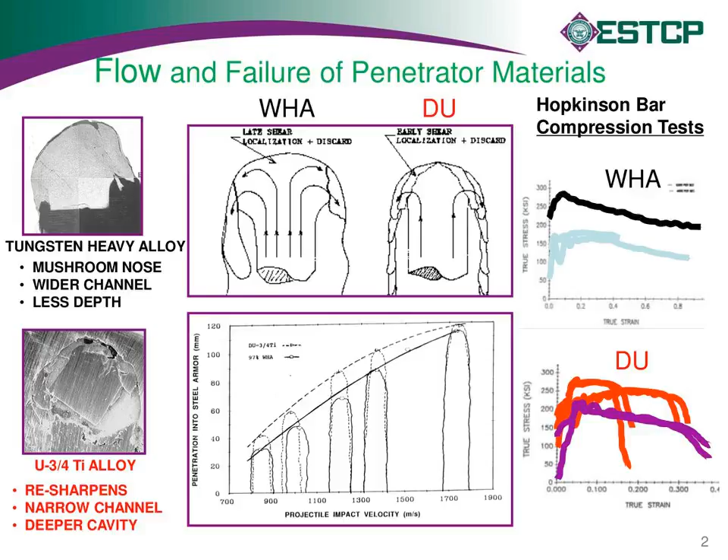The next slide, which would be slide 3, shows why we were taking this approach with a nanocrystalline version of tungsten heavy alloys.

In general, nanocrystalline versions of all materials tend to be stronger, tend to have less strain rate sensitivity, which is another thing that can tend to keep things plastically stable, and have less work hardening capacity because you've made them so much stronger. So there's a lot of basic reasons why a nanocrystalline version of almost any metal is going to tend to become more and more plastically unstable.

The illustration is in that plot there for just iron, pure iron, as you go from a grain size of 20 microns for the lowest curves. The curves here are both the quasi-static curve, which is the solid line, and the dash curve is the dynamic, in a dynamic compression test, the split Hopkinson bar.

As you refine the grain size from 20 microns, the two lowest lines, to 1 micron, it jumps up. You see the strength has gone up a lot. And then as you continue to refine the grain size, the strength continues to go up, but the shear collapse, that shear band collapse, suddenly appears in the nanocrystalline iron.

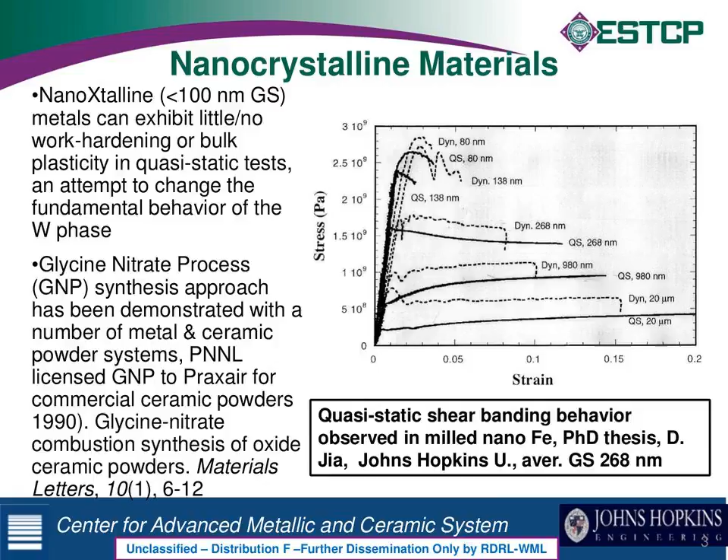So that's very quickly, that's a background in terms of why we were taking this approach, what we were trying to do with it. The next slide, just the technical objectives.

When we started this project, there wasn't a real demonstration that we could get this behavior with a nanocrystalline tungsten-based material. So that was the first objective, was to demonstrate that yes, we can get the shear banding behavior and that penetration behavior by going to a nanocrystalline version of a tungsten-based material.

Then we wanted to develop a process for making those materials in a cost-effective manner. And at the same time, and we'll get into it a little further in the talk, there were issues being raised with the conventional tungsten heavy alloys in terms of health hazard and possible carcinogen, mainly due to the nickel-based matrix.

Mainly due to the nickel-based matrix that holds together these tungsten-based composite materials. So concurrently with this test, we are looking at those issues and using the information from that to guide us in terms of what we select for the alloying additions or the matrix materials in our nanocrystalline composites.

And then the last statement just said, one, there should be a cost saving life cycle wise by eliminating DU. And there's also the political issue with DU that at the time, again, when we started this project, DU production was scheduled to end in 2014.

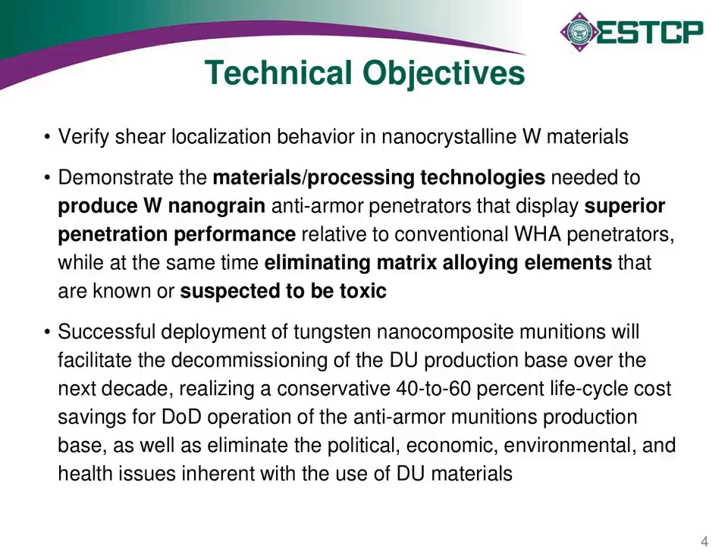The next slide. Lee, what's the, let's say, environmental rationale for closing down DU production? Because I imagine there's big stockpiles of it.

Right. I mean, most of the raw materials, of course, are coming out of the nuclear industry. Originally, they used up a lot of the green salt. Now they're using a lot of the gas, hexafluoride gas.

I mean, the whole rationale for not using DU, I think, is kind of weak in terms of the actual science of why they want to move away from DU. It's mostly political.

When they've done side-by-side tests with DU, actually DU is pretty safe. They've been tracking the guys from the first Gulf War. There was a lot of them that got fragged with friendly fire, so it was our DU ammunitions that were embedding frags in these guys, and there's really been no ill effects from that. Some of the rat studies they've done since then show DU really isn't an issue. Some of the tungsten heavy alloys are actually worse, and Brian Schuster will go into more details about that, but again, coming mostly from the matrix alloy, not the tungsten phase itself.

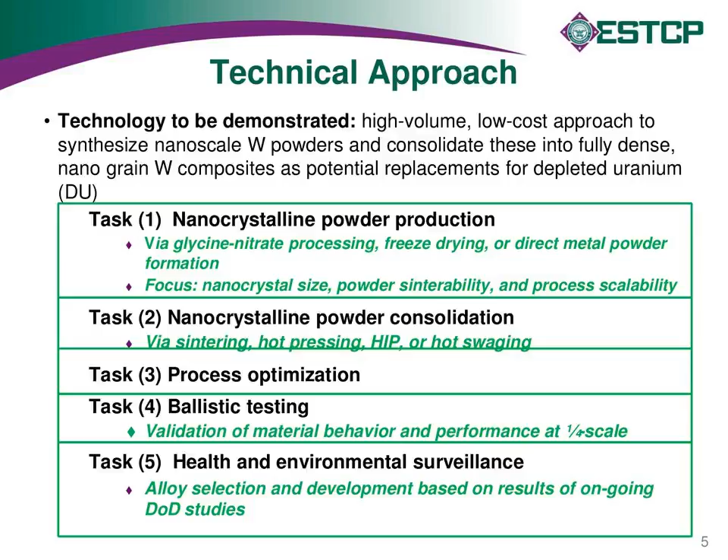Okay, next slide. Just very quickly, there's a flow chart of the two main approaches we looked at. On the left is the freeze-dry process, where you dissolve metal salts in a liquid, sublimate out the liquid, and then reduce it in a hydrogen-reducing atmosphere to produce the metal powders.

The other approach, and our main focus, was the glycine nitrate process, where again you dissolve the metals and the ammonium tungstate in a nitrate solution, which is heated until it dries out and then combusts, again reducing it to the metal powders in the end.

I don't know if Kirk has any other things to add to this at this point. I think the only thing I would add is that the glycine is a pretty energetic event. So when this spontaneously combusts, that's what produces the fine particulate size—it's the high energy associated with the combustion, and so that's how you end up with the nanoscaled materials.

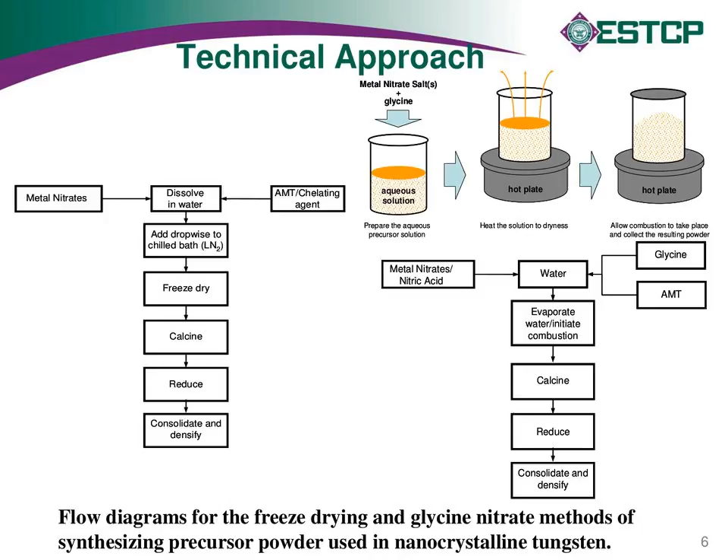Slide number 7, just a couple of quick things, more details on the technical approach — this ballistic test, just a schematic showing how we do those kinds of tests here at the lab.

We do ballistic comparisons against actual RHA, rolled homogeneous armor plate. You see in the yellow box an example of a laboratory sabot, so we can put the material in a launch package. It's pushed out of our lab gun through our experimental setup, which has X-ray equipment to measure velocity and measure pitch and yaw, because that can really push your numbers around. So you have to verify you have good pitch and yaw at impact, and then look at the residual velocity out the back, or how much penetration into steel you actually have.

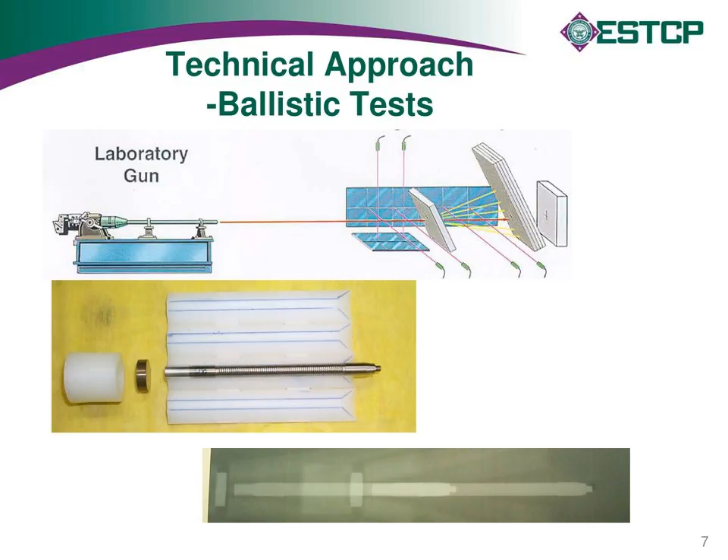The next slide shows what we were going to do. We have a large database for both conventional tungsten heavy alloys and DU alloys for a standard set of rods. These are all 65-gram mass rods. This particular plot shows data for an L/D length-to-diameter ratio of 15, so the rods are 15 times the diameter in length. On this plot, I'm plotting limit velocity — the velocity required to perforate a given target, in this case a 3-inch plate of rolled homogeneous armor — as a function of alloy density.

If you look at the black line with the black data points, those are all conventional tungsten heavy alloys. As you go from an 80% tungsten nickel iron to 90%, to 93%, to 97%, as you go up in density, the rod gets a little shorter but also shrinks in diameter, and the mass-to-presented-area of that projectile shrinks down. So you see this general trend: the limit velocity drops, meaning it takes less energy to get through this 3-inch RHA plate with the higher density material — that's your typical trend line. Those are all mushrooming-type tungsten heavy alloy materials, like you're seeing in that little box there.

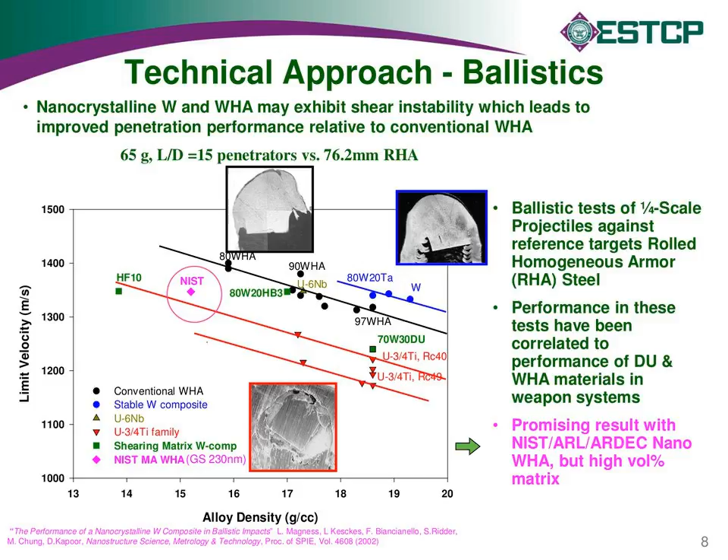Next slide. A couple of quick slides just on some of the background and the health effects with tungsten heavy alloy. Again, Brian Schuster will get into more detail with that, but this all came out of a study they did for the Gulf War illness things, looking at those DU frags. They were worried about the DU frags in the troops, and they decided to throw in as a comparison some conventional tungsten heavy alloy pellets as well.

What they found was after 2 years, the DU rats were fine, no ill effects at all. But after 6 months, all the rats that had been embedded with tungsten nickel cobalt, which is one of the major alloys that's out there, all of them had nasty tumors that had metastasized to the lungs, and they all had to be destroyed within 6 months. They were usually showing signs within 3 months.

And when Brian looked at the pellets themselves, what he saw was, with tungsten heavy alloy, it's a composite of these tungsten particles embedded in a nickel, cobalt, tungsten matrix that, at least to a depth of 3 or 4 of these tungsten particles into the microstructure, the matrix had been completely dissolved away. So you basically put a galvanic cell, 2 dissimilar metals in a salt environment in the body, and that nickel cobalt matrix showed up in the bloodstream, in the urine, and nickel was a known carcinogen. The cobalt probably didn't help, but it certainly didn't help limit the amount of nickel that went into solution. So that was a surprise out of those tests initially.

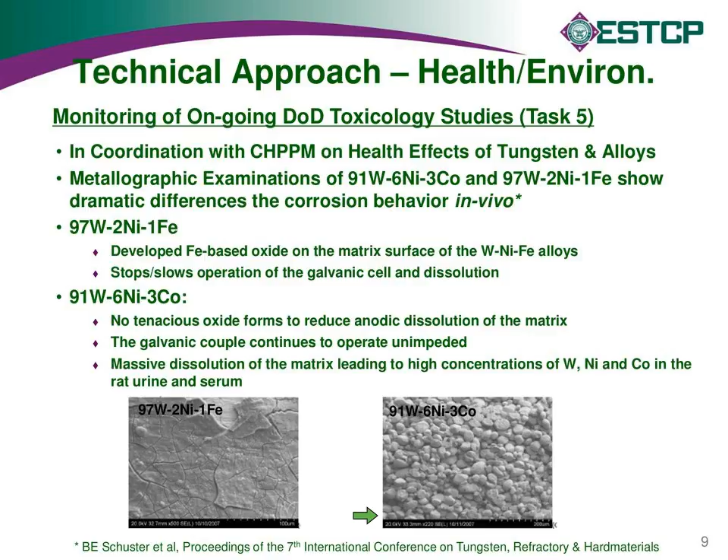Next slide is some of the other things we were going to be doing: collecting some aerosols, the respiratory health things. We did that during some of our large caliber ballistic tests, collecting some of the aerosols. Brian worked with the University of Texas on doing some bioassay work on that, on cytotoxicity. And then the main thing he looked at was different families of tungsten heavy alloys with different ratios of tungsten, nickel, iron and cobalt, and how much iron you needed in the system to make it protective against that corrosion and dissolution of the matrix. He'll go into more details on that, but just to give you an idea of what the approach was going to be.

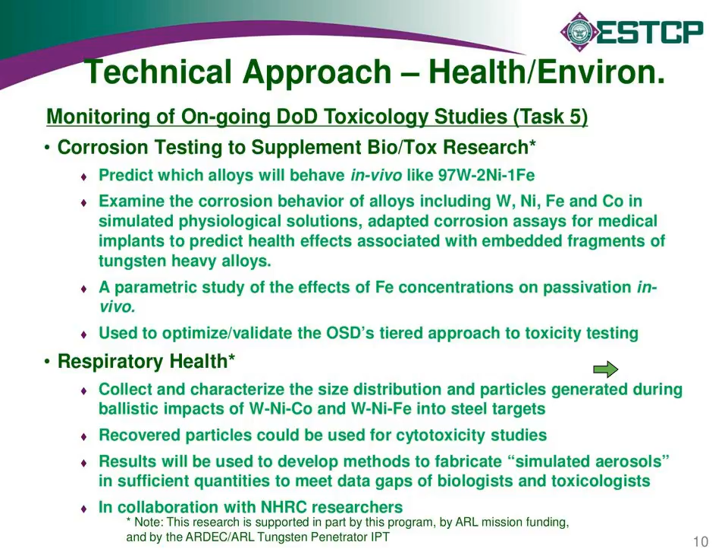I'm running a little late, so the next slide is, well, that's a residual — you can skip that one, skip 11.

So on to the results with the nanocrystalline — this is mainly task 1, nanocrystalline powder production. Again, we looked at those 3 different powder synthesis approaches. Our criteria were: how fine a grain size powders could we produce, how sinterable were those materials, and how scalable was the process going to be. Eventually, we down-selected to the glycine nitrate process because it did produce the finest tungsten crystallites, averaging around 30 nanometers, whereas they were like twice that size with the freeze-dried process.

We had reasonable success getting to moderate densities in the early sintering process with that material. As Kurt just explained, it's a reasonably well scalable process to do production also. So we thought that was the best approach to take going forward.

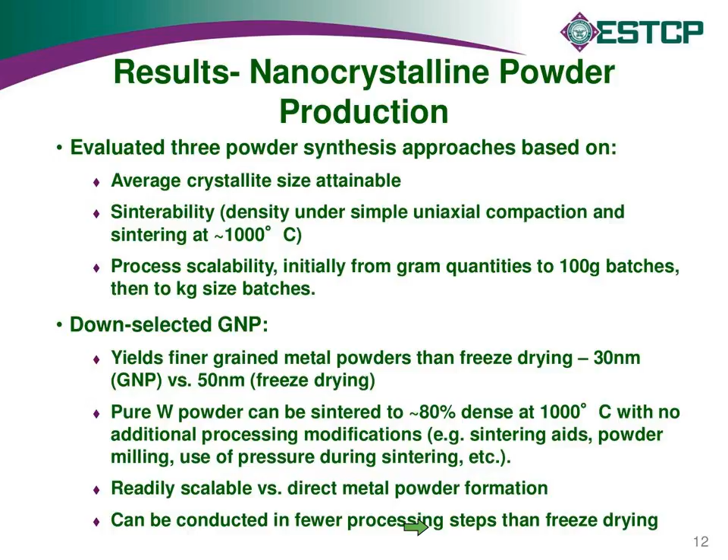Next slide, there's a schematic. Maybe Kurt, do you want to explain the picture there? Again, a little synopsis of what you do in the glycine nitrate process, in terms of putting the things in solution, then drying them to the point of combustion. Here's an example of their facility.

I think one of the things about the facility is, when it does ceramic powders, it can run continuously, but the problem with the powder sizes we're trying to get here is they're pretty difficult to handle. So in this case, it's a batch system that they would have to scale to in order to capture that. Your production filter and collector system can't be exposed to air, they have to be captured in a batch. That would be the only limitation, the batching of the capture system.

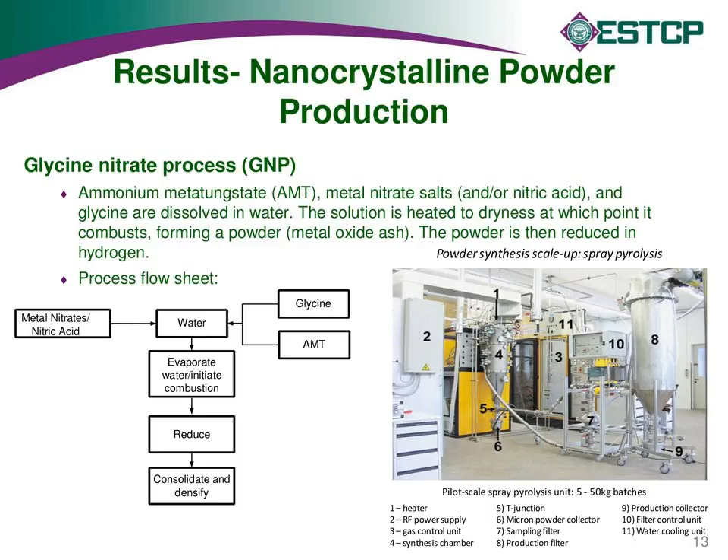All right, next slide, number 14. The photograph in the upper right is an example of some of the powder being produced, and you see it's an agglomerated powder with very small individual crystallites of tungsten, again with about a 30 nanometer grain size, verified also with the XRD analysis.

The microstructure down at the bottom is an example of one of those early sintering trials. Again, not full density, so there's a fair amount of residual porosity in this sample, but we had pretty good grain size, looked promising at this point, sub-micron finished grain size in the material.

The next slide - I guess the only thing I might add, Lee, back to the agglomerate size, is that our health physics people don't consider that a nano powder. So some of the issues you hear about handling nano powders don't apply, since the agglomerate size we work with is large enough that it's not considered a nano powder, even though it's nanocrystalline and nanostructured.

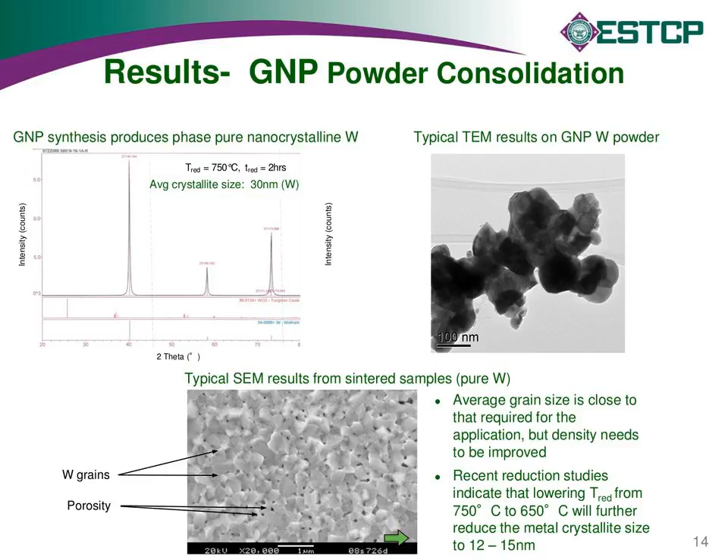So the next slide had to do with working with these powders. We looked at a lot of different things, trying to consolidate these powders to full density or nearly full density, yet not grow the grain size. Probably I should ask Kurt to go over this in a little more detail.

There's some slides that follow showing examples of what we did. There's a pretty well-known challenge in consolidating these nanostructured materials and maintaining the nanostructure. There's some basic physics that occurs with the contact angles of the particulate during sintering operations that ultimately limits what you can do. So in a lot of cases, you're required to use extremely high compaction pressures to facilitate compaction of the powder prior to sintering it.

What we tried to do with sintering aids is, since sintering is controlled by surface diffusion between the particulate, we tried to add small amounts of elemental constituents to facilitate the diffusion without causing grain growth. One of the best activators for that is nickel, so in some cases we used small additions of nickel to enhance the diffusion of the tungsten.

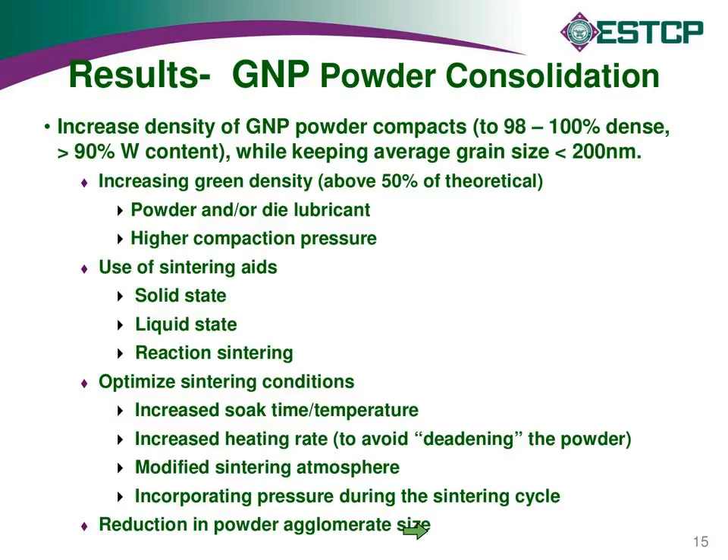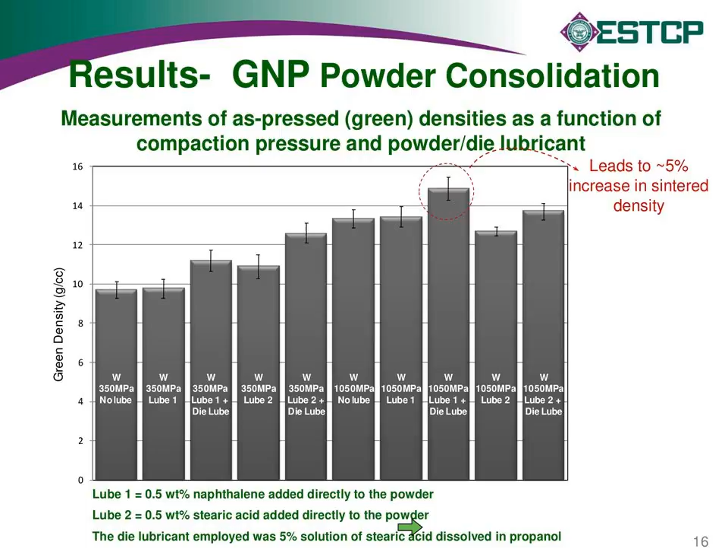Right, yep. All right, so the next few slides are just examples of some of the things we went through. We don't have to go into too much detail, but we looked at different lubricants and high pressure conditions in terms of powder compaction, trying to improve the sinterability. That was slide 16. Slide 17 shows some of the results using a grain boundary inhibitor, yttria.

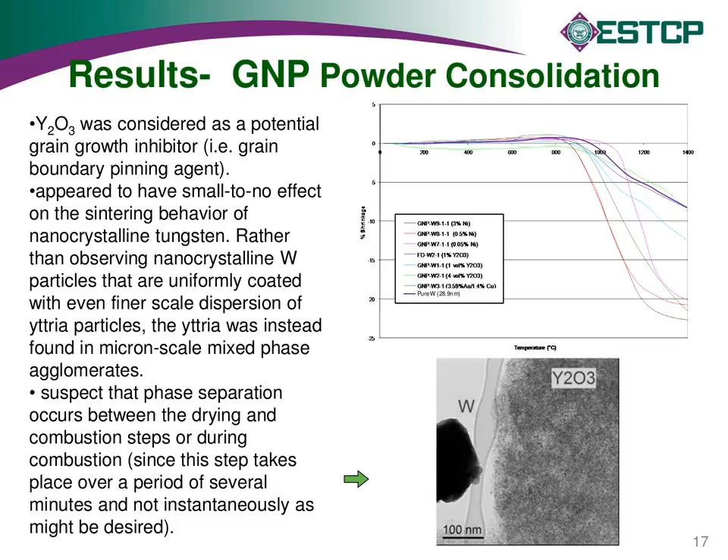Is there another slide of the shrinkage, or is this the main shrinkage diagram we have? I think there's another slide coming up. Right, this is the only one for the yttria. Here we go, one for the nickel. Maybe you can do it in more detail.

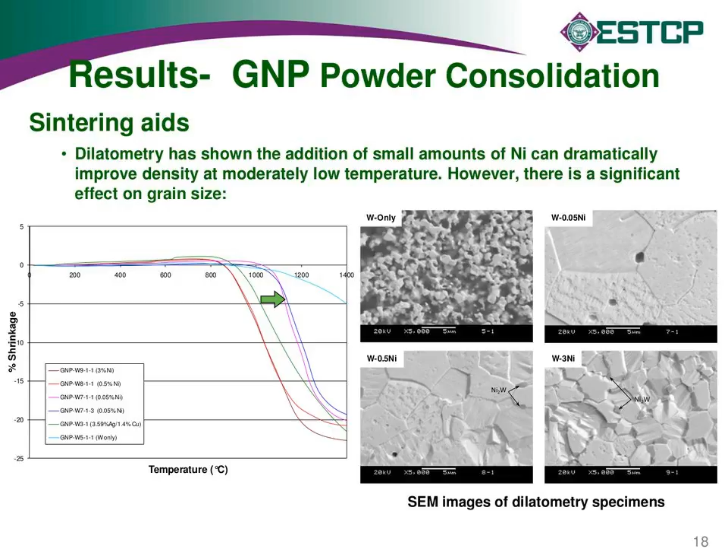So we knew we needed to add some type of sintering aid. On that graph there's a series of sintering aids, and the more nickel we added, the higher the sinterability. The two lines on the left where we got a lot of shrinkage at very low temperatures were 3 and 0.5 weight percent nickel. Then we added lesser amounts of nickel, and tried some combinations of silver and copper because nickel causes some coarsening of the tungsten, so we tried silver copper additions to try to keep the grain size down. This was the sintering aid diagram and how they went.

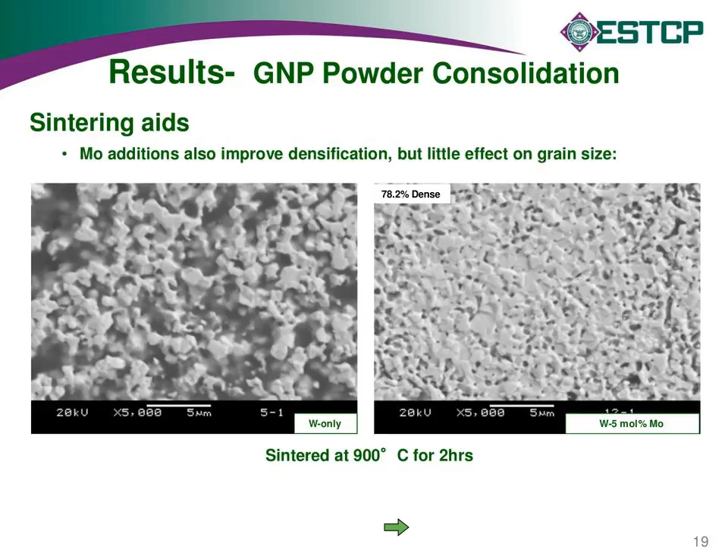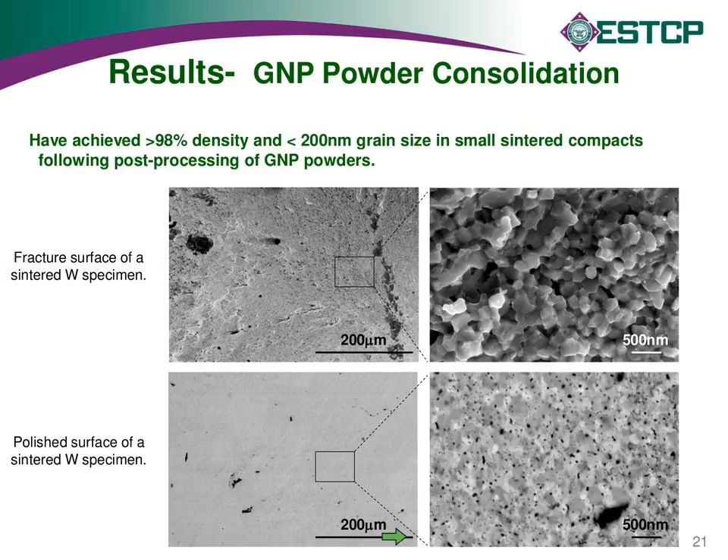Let's go to the next slide. Well, again, some other attempts with pressure - the big thing was trying different consolidation swaging approaches to try to consolidate this material before we enter the sintering process, to help things along.

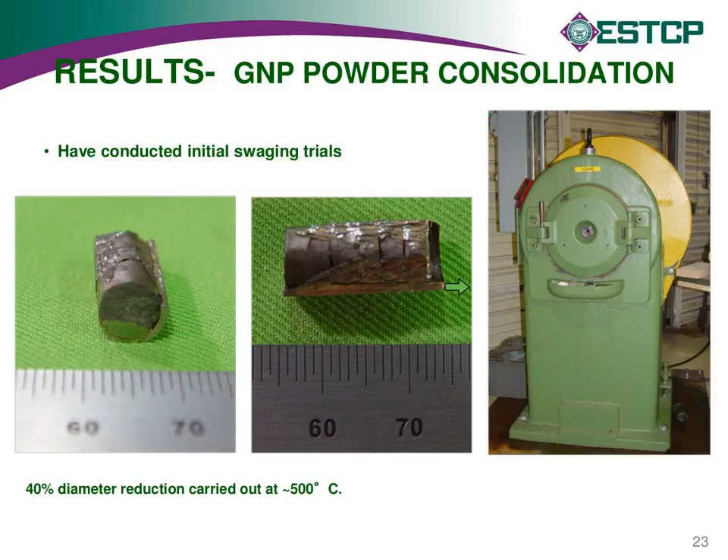And then the other major work in terms of consolidation was looking at hot isostatic pressing. Again, the problem we were having with these highly agglomerated powders is that when you fill the can, you end up with a material with a very low tap density, so a lot of void space. And when you HIP consolidate and the can crushes in, you end up with a highly deformed final can that's very difficult to get useful specimens out of. We tried various things to improve that, but weren't very successful.

I don't know if you have any other things to add to that, Kurt. No, I don't. There's a lot of promise in nanostructured materials, and this has been the consistent problem. We've struggled with this - it's a difficult area.

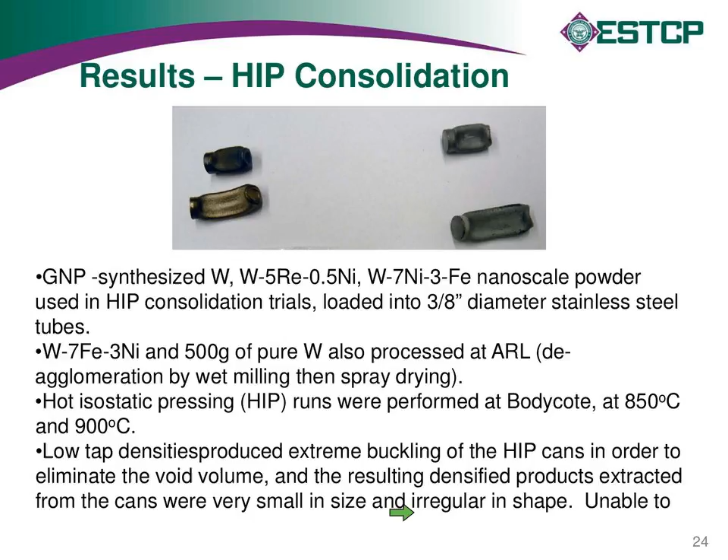So here's where we started looking at some of the de-agglomeration processes. This is the milled powders. After going through the GNP process to produce, in this case, a tungsten nickel iron composite powder, it was then wet milled to de-agglomerate the powders so we could improve the packing densities in these materials.

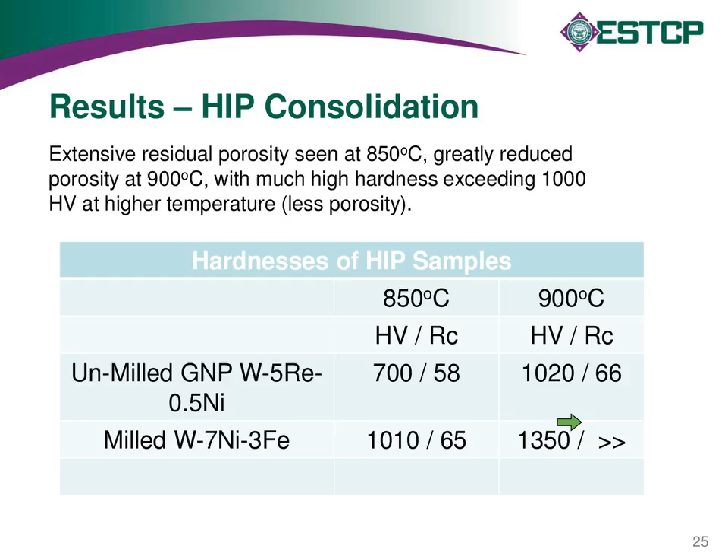And with some success - what you notice is normally you don't see the hardness going up at higher sintering temperatures or higher hot isostatic pressing temperatures, but these numbers here at 850 are low because there's still a fair amount of residual porosity in the material. This is more closer to the true hardness of the material when we're getting closer to full density. So there was some promise there, but again...

We had difficult times getting a large enough sample to work with. There was still a lot of shrinkage, and I know the Bodycote guys went through a lot of iterations trying to come up with a can that would consolidate and not burst open. Difficult thing to work with.

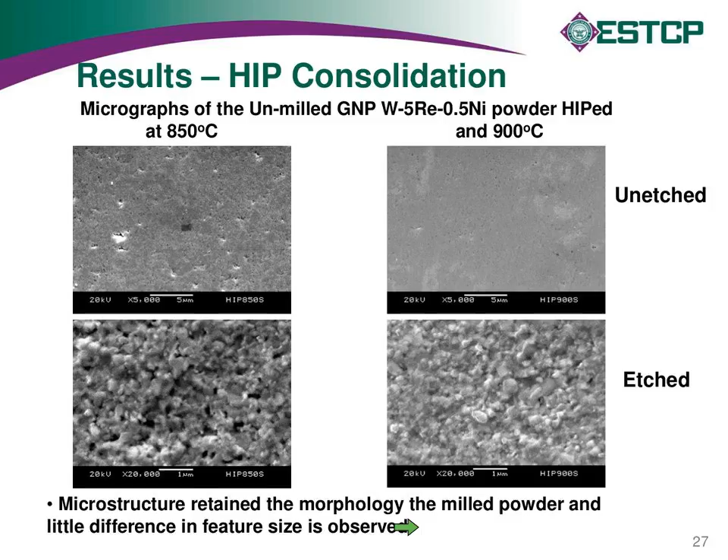Same thing, just comparing the milled and unmilled powders. In the end, what we ended up doing was going with the ARL wet milling process to de-agglomerate, and then conventional sintering at the end.

We were working with Brady Butler over in the materials division, and he was looking at tungsten rhenium alloys made by mechanical alloying processes. We wanted to look at a much more intimate mixture of the two materials by the glycine nitrate process. So that's what these powders were, and then they were de-agglomerated in Brady's wet mill and then sintered.

And we got a pretty good material. It's just barely submicron in the end, but close to full density. Are those black spots then not pores, or are they something else? I think those are pullouts more than pores from the polishing. Yeah, the porosity wasn't that bad.

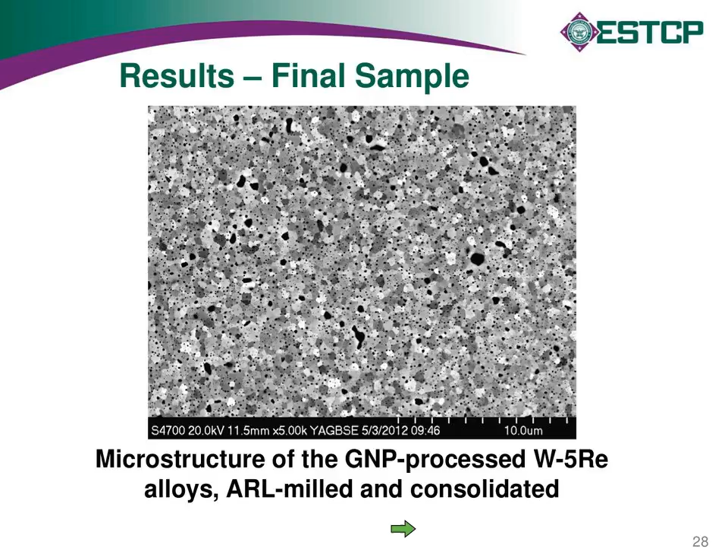I don't know if you can see if the contrast is good enough. This is the projectile flying, we have two images here in the X-ray. You can see the pusher plate in the launch package behind, and there's a plastic obturator you can maybe faintly see there. But it was a very good flyer. Our measure of the total pitch and yaw at impact was only less than half a degree, 0.43 is the number we came up with.

So, good impact. The velocity was close to where we wanted it, 1417. If it had gotten through at that point, we would have been sure that we'd had a material that was better than a conventional tungsten heavy alloy of the same density. This material was about 18.5, almost 18.6 in density.

We did side-by-side comparison tests into the same block of RHA with a conventional tungsten heavy alloy here. This is the X9C alloy, which is 97% tungsten nickel iron, and its limit velocity is about 1420 meters per second against this target.

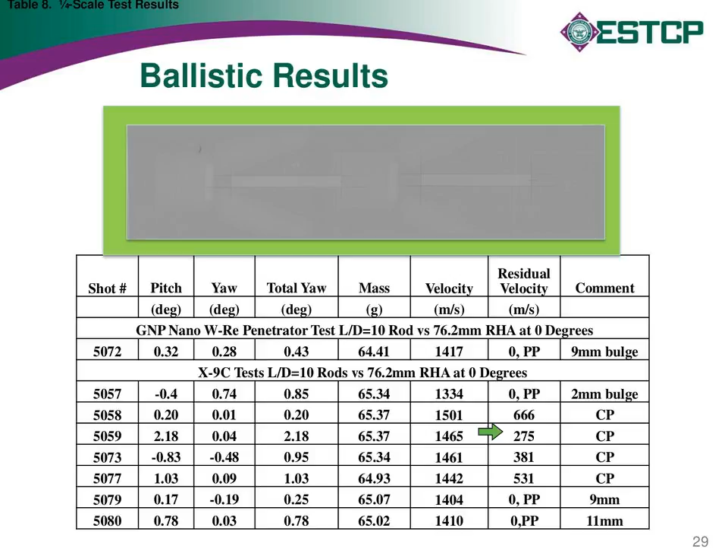So remember that a conventional tungsten heavy alloy, or a pure tungsten material, would have been worse. Let me show that on the next slide.

We haven't shot tungsten 5% rhenium, but people have shot tungsten 26% rhenium and 10% rhenium, and they all behave basically like pure tungsten. Extremely stable mushrooming behavior. You end up with a very smooth penetration tunnel, not this roughness you're seeing on the walls, and it never really lets go of the material.

The entire penetrator is still one piece essentially after the event. It's just been turned from a solid rod into a hollow tube. So we didn't have that happening here. We were definitely seeing some shear localization

and discard behavior. I think that's why we're in the same neighborhood as the tungsten heavy alloys, which also display a little bit of this behavior with the tungsten nickel iron matrix. So we were getting a little bit of that behavior with essentially no matrix phase, just tungsten rhenium material. But again, we're still way far short of DU performance at this point.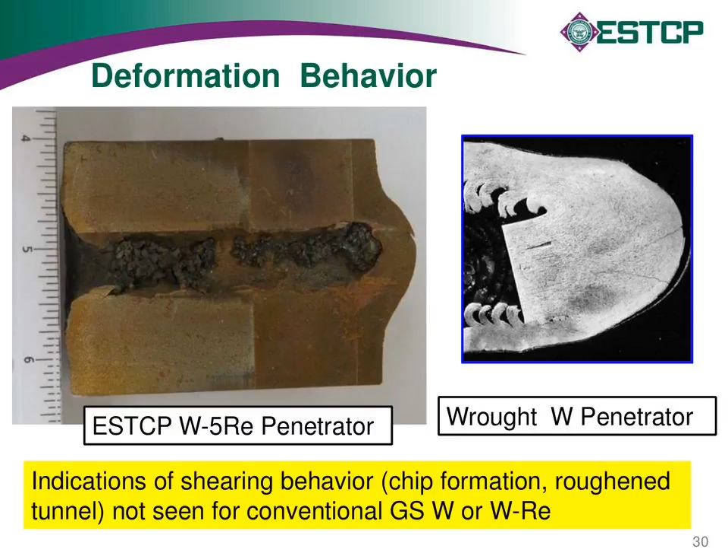Just to show where we are, the next plot, the data point - if I had to assign a limit velocity to that one shot, it was very close to getting through the target. So we were right on the edge, basically on the conventional tungsten heavy alloy line.

Like I say, if it had been a pure tungsten type material, it would have been above the line. So we were seeing some improvement, but not a very dramatic improvement, and well short of this gap of what you get with the U-3/4 Ti alloy.

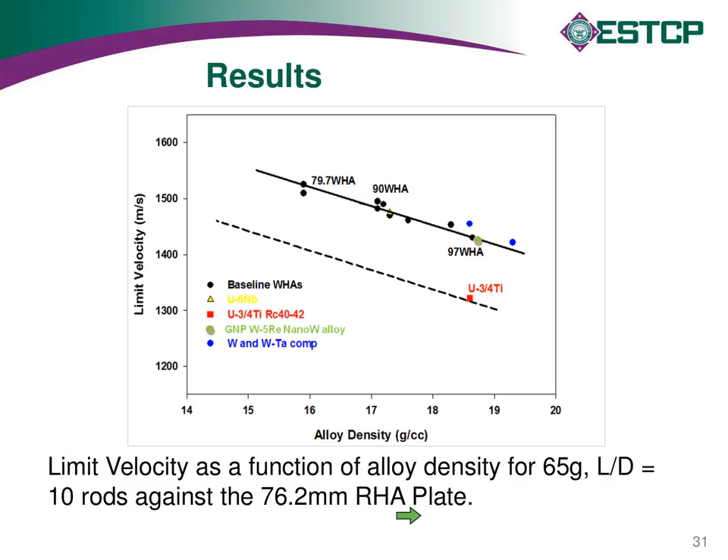So that was basically the ballistic results. Now we have the section on all the health survey stuff. Brian is here. He can go over some of these slides unless there are some questions at this point.

So how much time do we have here? What are we doing? About 10 minutes. Okay.

So I guess all of this stuff has been published, so I could make the manuscripts available. With Professor Murr at the University of Texas at El Paso, we did some tests where we examined the cytotoxicity of aerosols generated from the ballistic impact, sampled the size of the particles, and I guess there was a fairly dramatic effect, but I'm not sure that was exactly the best screening method, because it could have been altered by the presence of some of the propellants in the test.

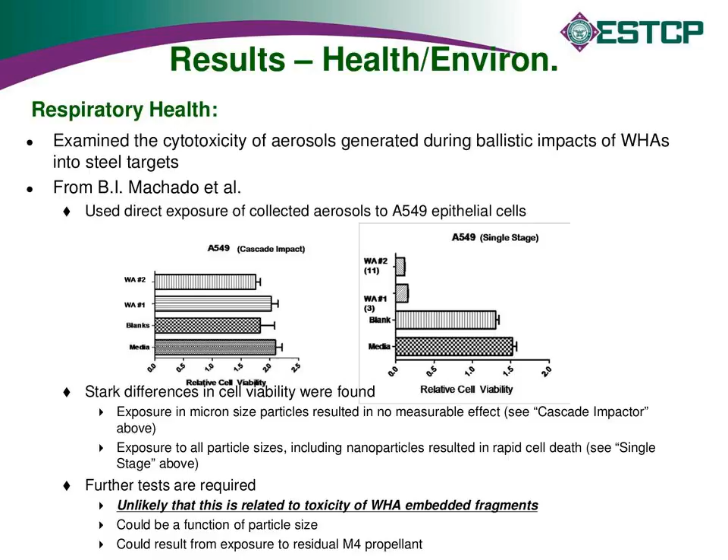I think what was more important, I have to figure out, is the in vivo corrosion behavior. So this is something listed as in preparation, but that has since been accepted for publication and is available. I think Lee covered this before.

You have this two-phase microstructure where you have pure tungsten particles surrounded by a matrix phase. For the tungsten nickel cobalt alloy, the composition of this matrix phase is 43% by weight tungsten, 38% by weight nickel, and 19% by weight cobalt. For the tungsten nickel iron, it's more like 22% by weight tungsten, 51% nickel, and maybe 2% iron.

If you look at the concentrations of metals present in the urine of the rats taken at different time points - 1, 3, and 6 months - you see an ever-increasing concentration of tungsten, nickel, and cobalt. If you normalize that ratio, it matches that matrix exactly. So it's pretty clear from that, plus some subsequent SEM analysis of the corroded pellets, that it was definitely coming from the matrix only.

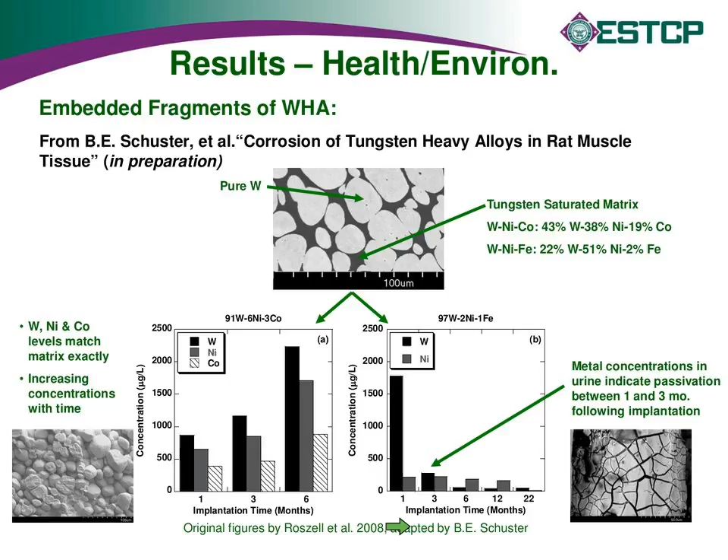We did some work trying to adapt some sort of standard assays that were used for medical implants. We did some others just looking at the simple corrosion and analyzing what was coming out in solution in phosphate buffered saline.

What we found with sort of the standard ASTM F2129 on tungsten heavy alloys, that doesn't seem to be a good screening test for those materials. That's meant to screen materials engineered to resist corrosion in the body. Whether these alloys cause cancer or long-term health effects, they corrode either way - whether through galvanic cell corrosion or through passivation with oxide formation. So this just isn't an ideal screening method for that.

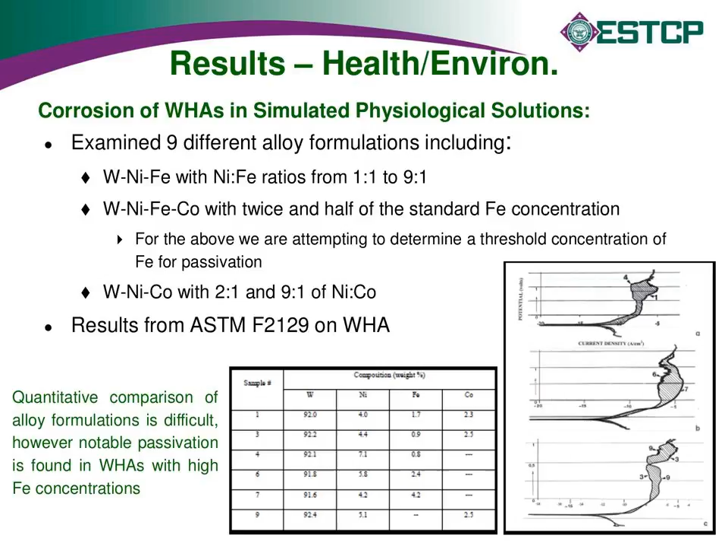What I think was a much better screening was simply doing long-term soak experiments in the phosphate buffered saline, and then examining the surface. We started to identify a range of different nickel iron ratios that would behave similarly to the 7 nickel 3 iron alloy, which was the alloy that did not show tumors when present as an embedded fragment.

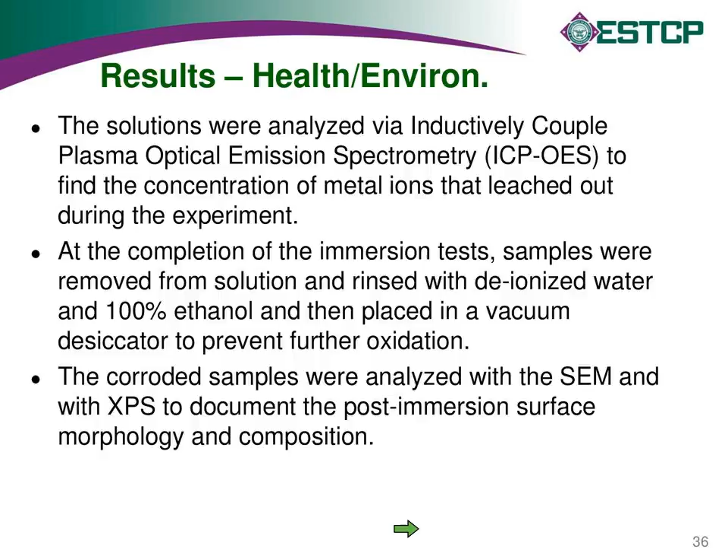So we examined what was coming out in solution with ICP-OES, and then examined the surfaces with SEM, and then looked at the surface chemistry with XPS. I have a conference paper that we wrote on this, showing the whole range of different alloy compositions that we looked at, including the baseline, which was the identical matrix composition to the tungsten nickel cobalt alloy.

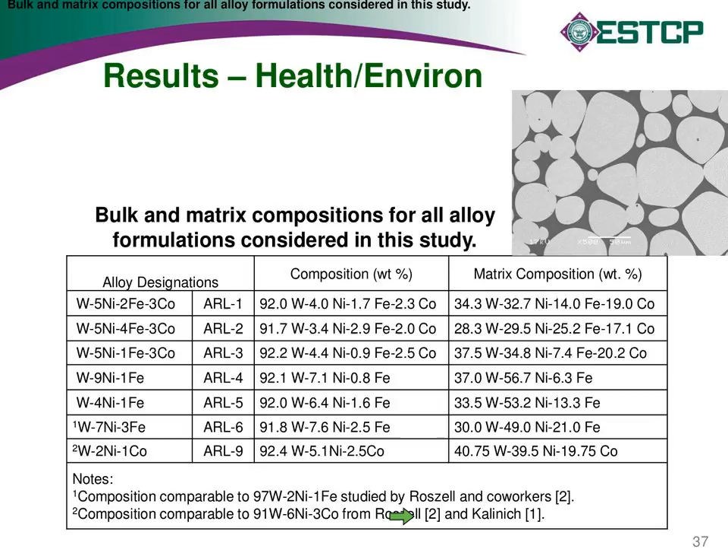I guess this can be kind of a long story, but to make a long story short, there's evidence that you can improve the engineering properties - the ductility and toughness - of some of these alloys through... sorry, by increasing the nickel to iron ratio.

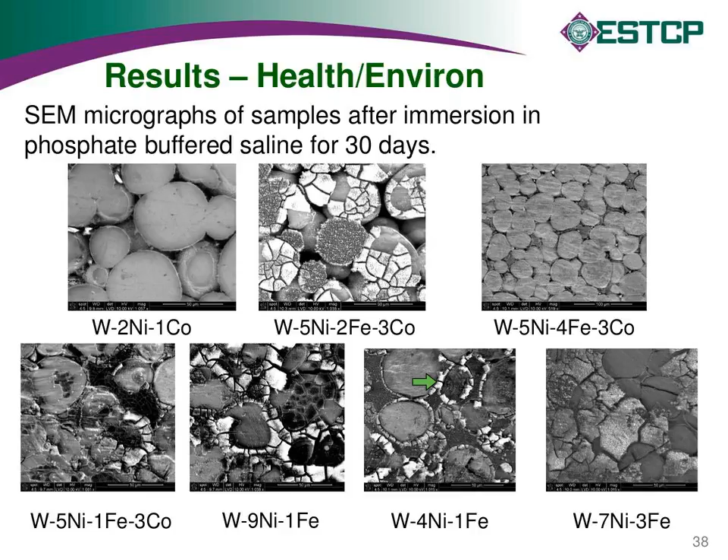Moving on to 39, I can provide the conference proceedings if anybody is interested. It's just looking at the ratios of all metals coming out in solution, looking at each individual species like tungsten, nickel, and iron, which is fairly easy to do in a controlled manner in these experiments, something you wouldn't necessarily have the opportunity to do during an in vivo study.

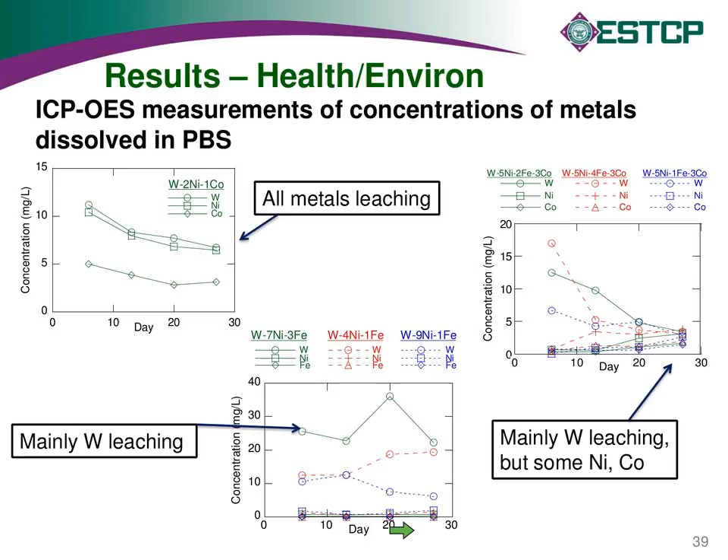I think the main thing to take away from this is, in any case, the corrosion of the tungsten nickel cobalt alloys is associated with preferential anodic dissolution of the matrix phase, confirmed in a number of different cases. And you have a decreased dissolution rate in any of the tungsten nickel iron alloys. There's some evidence that as you increase the iron concentration, you decrease the dissolution of nickel.

In some cases, though this is a little bit counterintuitive, you can increase the rate that the tungsten is dissolved. Although in this case, that may not be all that bad. The one thing that was shown in the Laurie Brazell study was that pure tungsten alone implanted in the rats wasn't associated with that same tumor formation. There were no adverse long-term effects.

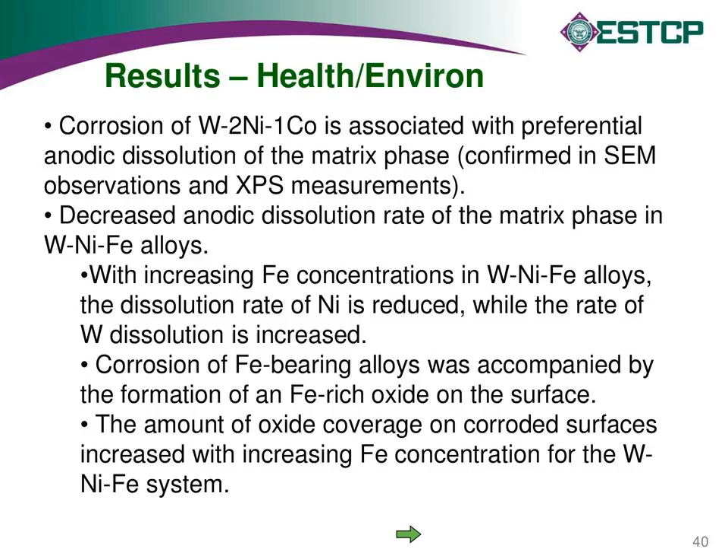In general, the amount of oxide coverage on corroded surfaces increases with iron concentration. But I guess from this, you can't actually pick out sort of a minimum threshold, so it's something that may require further examination.

I think we can skip ahead to, I guess Lee has, starting on slide 42, the project funding.

This is just one of those mandatory slides again, the project funding and then some of the leverage funding. We were using some of our in-house funds. We were also working with the folks at ARDEC with these materials. Also worked with Global Tungsten Products out of what used to be GTE Sylvania, out of Towanda, PA.

They provided some of the powders. It was mainly, they supported us in terms of material goods. And that we actually continued on. We are late getting all this work done because we're having all this trouble with the consolidation. So we actually continued on our own dime quite a bit, trying to work on that process.

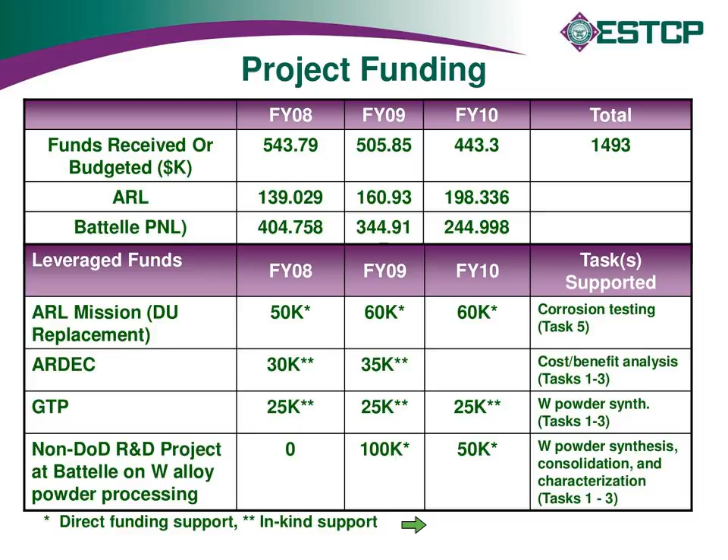And the last phase was the wet milled deagglomerated powder is what we did. So, wasn't that much to transition. I mean, I think the stuff that Brian talked about is an important thing in terms of a screening method for looking at these alloys.

Knowing what we should stay away from, and how helpful improving iron additions might be to keeping us on the right side in our alloy compositions. I'll talk a little bit later about, it's also guiding some work. We have a similar project going on with nanocrystalline materials with ARDEC, which was very successful.

It's a different process entirely in terms of making the materials, but actually did develop the adiabatic shear behavior and everything. But we're able to use, again, the guidance from the corrosion and the health issues in terms of alloy selection for those materials.

The GNP process itself was further improved. Maybe Kirk can talk a little bit more about it, but it's a nice technique for producing very clean, very fine grain-sized powders. Certainly we didn't have that before.

In general, ARL has relied on nano powders that we obtained from China. So it was very good to have another source of supply and a process in-house so we could look at some of these materials. And the Chinese stuff was usually very high in oxygen, so that was often a problem.

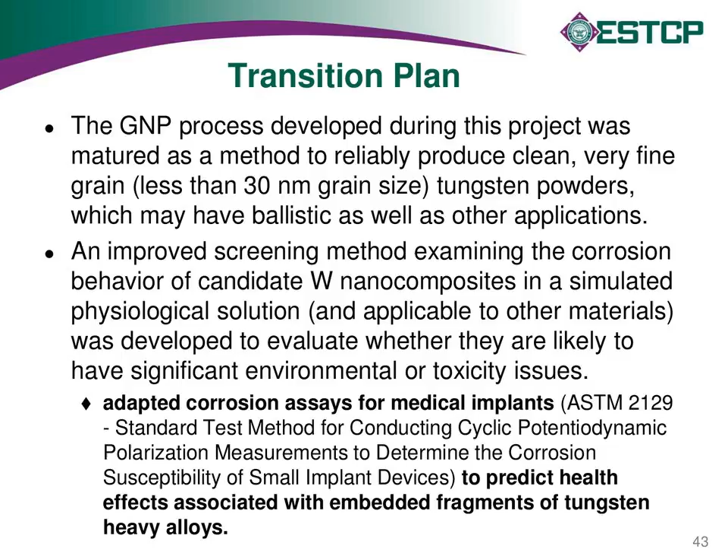Let's see, the next slide, conclusions and summary. I just mentioned this, I haven't shown any of that data. That program is classified. If you want to see some of that data, we could probably arrange something to do that.

We did about a little over a year into this project, we demonstrated in this other program that yes, nanocrystalline tungsten-based materials can exhibit the desired behavior, but it was done by a different means than this glycine nitrate or freeze-drying synthesis processes. It was a different technique. So we are still pursuing that.

And you did indicate that the work you have done in terms of toxicology is applicable to that effort as well. Definitely, yep. That's something that needs to be pointed out and specified, that at least that work was something that is transitionable or did transition. Yeah, I think I had it on the transition slide. Maybe I didn't say it that clearly, but yeah, okay.

It's definitely guiding all our continuing work this way, and helping us in terms of alloy selection. Is it also, Lee, though, is it also impacting your non-long rod type development work?